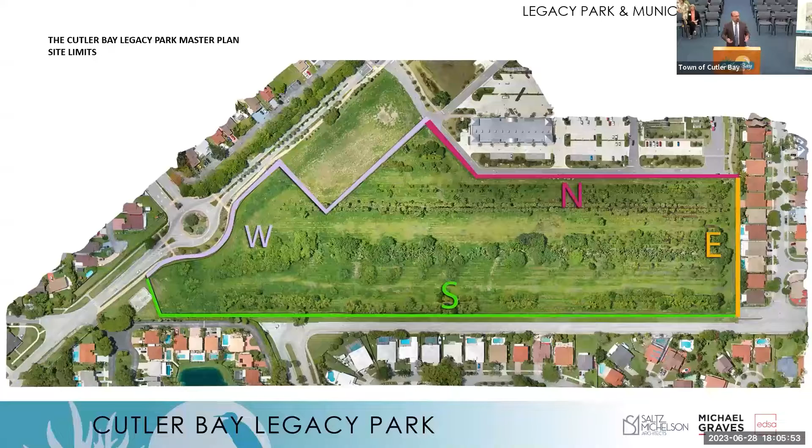As we started this journey, as we started to look at the initial concepts for the site, we recognized the scale of the site that the city was requesting. We recognized the adjacencies from the residential to the Publix center to the adjacent properties. And by virtue of the program that was in the original RFQ, we started to conceptualize, as you can see here, a hand-drawn drawing with some magic markers on how the site might lay out.

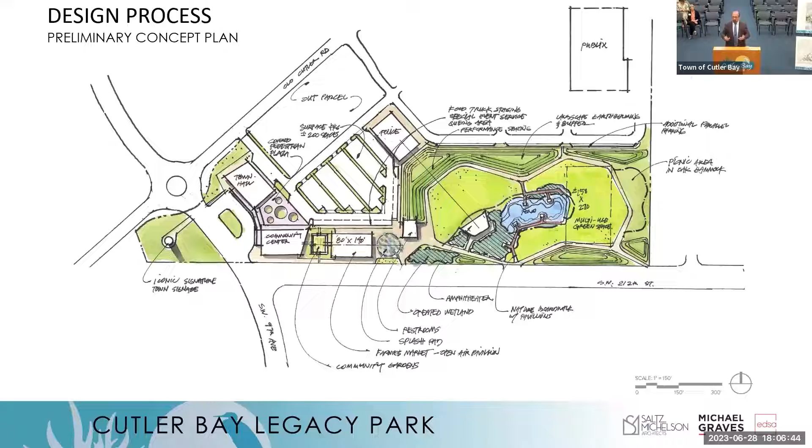By doing it this way, it's the informal first step of the process. We get feedback. So one of the things, for example, if you notice on this site plan, we had all the parking on grade. After the interaction, it was decided that we really needed to study, investigate, and incorporate a parking garage into the project for the benefit of the project.

And that started to be some of the image here. This is another hand drawing, a little bit more refined, but it's starting to take form and more shape than the informal previous drawing that you saw. The locations of the buildings are more exact. The shapes are starting to come through fruition by virtue of the program that has been established, taking a look at the different spaces on the site itself, the informal fields and amphitheaters, and the fact that it was identified and determined as a sports park.

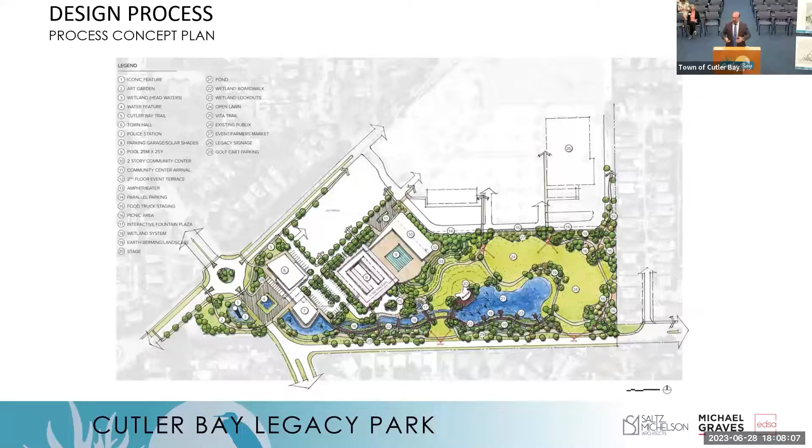We wanted to create the natural area, the retention area, the lake, making sure we had walkways and picnic areas and places for interactive fountain and a tot lot for children and things like that. We talked about extensively golf carts getting to the site. We spent time with the police department to talk about their concerns for securing the site, while on the other hand, we talked about the openness that the park should feel, and everybody should have access to it, and it should feel comfortable. So speaking to everybody, we believe we can achieve everybody's needs and deal with everybody's concerns through good design. That's part of the process that we're going through.

So now we have the master plan. And on the master plan, you see it's taken the transition of going from the hand drawings into the computer. It means we're getting serious now. What is the master plan? Basically, this represents the layout of the site, the footprint from which the rest of the project will be developed.

By virtue of finalizing the locations of the buildings now, we can actually start as the next step designing those buildings, because we know where the front door is and we know the orientation to the sun, and we'll be able to maximize the potential of each of those buildings by virtue of the locations they are.

We've investigated the alternatives to the project. We're happy with the locations of the buildings with regards to the parking garage and the community center, and the conversations we've had with regards to the pool.

If you can see here, going through the legend, starting towards the traffic circle, items 1, 2, and 3: the iconic feature, the art garden, a little water feature, wetland. We'll start on the adjacent piece of property as we cut through 97th Avenue.

The Legacy Park signage will be there along the traffic circle on Cutler Road, so people will see it from multiple directions as they come and travel to the site or bypass the site.

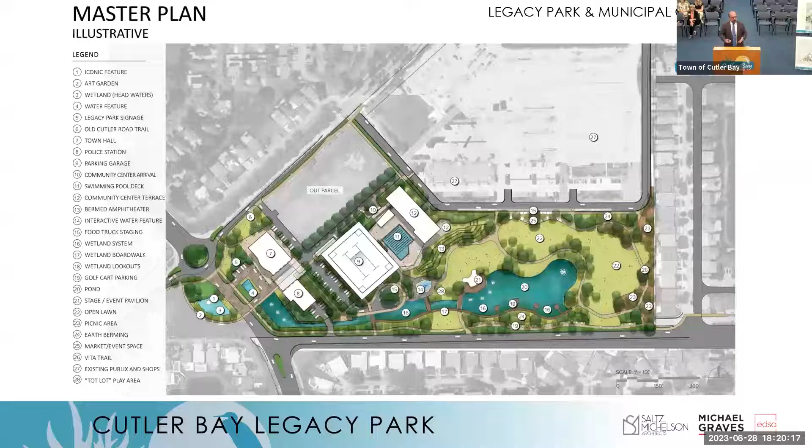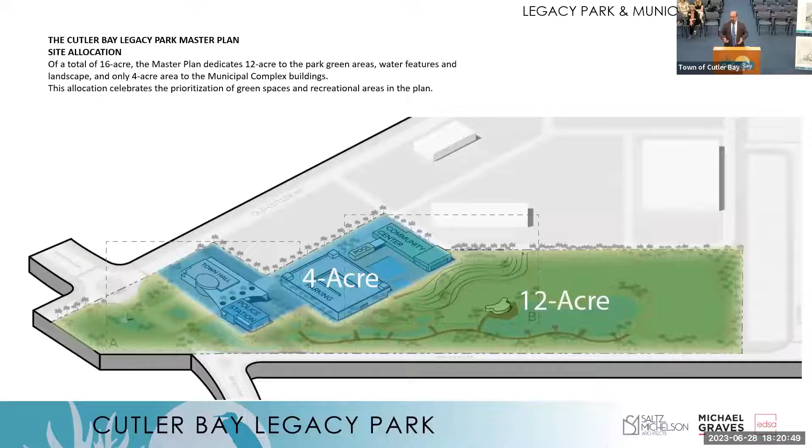In terms of vital consistent statistics, just to make sure everybody understands the work we're doing is consistent to what you've been representing to the community for a long time now, since the bond issue came out: approximately 12 acres of the site still represents the natural park area. And you can see that the physical development of the buildings represents approximately 4 out of the 16 acres. So the design pulled together in a manner consistent to what was always presented to the community.

Additionally here, this diagram starts to put some three-dimensional aspects to the buildings, the garage, and the park. So you start to see the volumes take shape. Again, the buildings have not been designed yet, but volumetrically, you start to see that there's nothing overpowering about the locations or the sizes of the buildings—they'll fit very nicely into the community.

The town hall will be very nicely visible from Cutler Road, and the neighbors directly to the bottom along 212th Street won't be greatly impacted by the construction, the buildings, the community center, or the garage. Those are internal to the park, and they'll basically have a beautiful adjacent neighbor of the perimeter of the park itself.

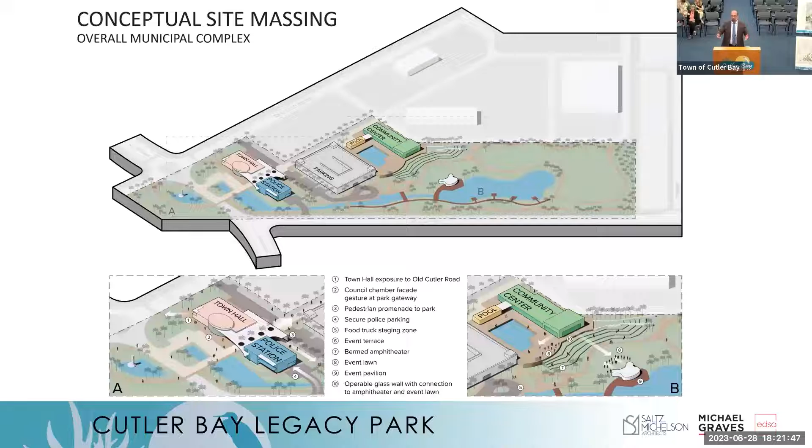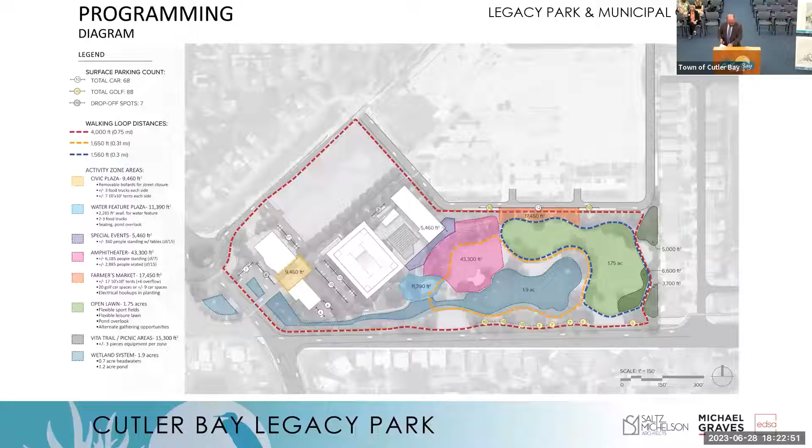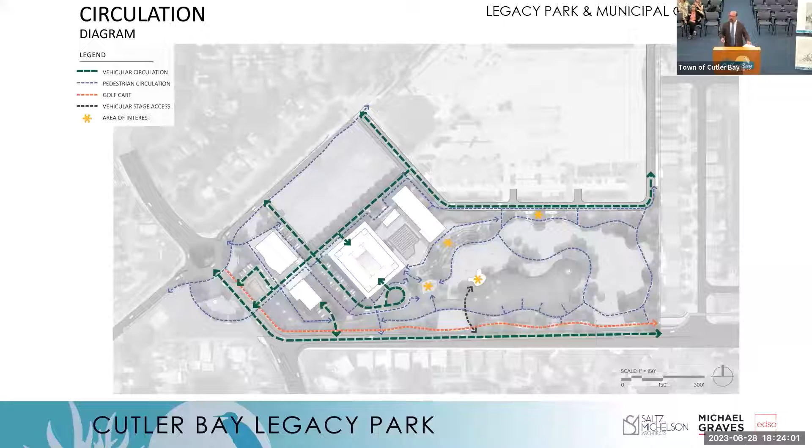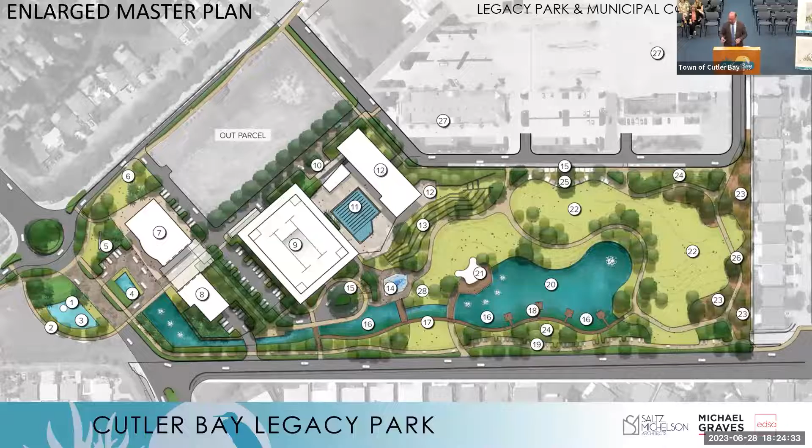We haven't designed the buildings yet, but we're looking for a contemporary image to the buildings and character of the site we've designed. We're going to take a look at the environment and sustainable items that are sensitive to the local community, both in what we use and in the construction of the buildings themselves, minimizing our carbon footprint by selecting materials that are available and local, and making sure we meet and exceed all the LEED criteria you'd expect for a project like that.

With that, I'd like to thank you on behalf of the team and answer any specific questions that you have.

Well, thank you very much. Each time we see this project, it seems to get a little bit better and better. But I guess that's what to expect. We got probably close to 100 hours of discussion with both the council and the community involved in this. I think generally we have a great consensus on what's going to be a beautiful addition to the town of Cutler Bay. Consensus doesn't give everybody everything they want, but overall it's pretty much what a majority of people want and satisfies a lot of the needs. With that, I'm going to open it up for the council for any questions.

Vice Mayor Callahan: No, just a quick comment. The closing slide just really said it all. I'm just so happy that this is a park that has a town center versus a town center that has a park. I really love that.